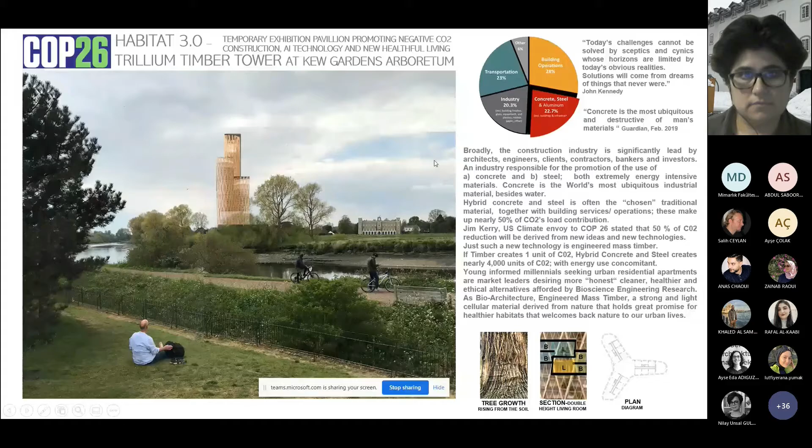The bigger issue was to see whether new ideas could be brought forward, because construction, particularly steel and concrete, make up about 23% of the materials used, and whether there's an alternative that might be suitable. About 40 to 50% of all CO2 actually has a lot to do with the use of materials and also the life cycle use of energy.

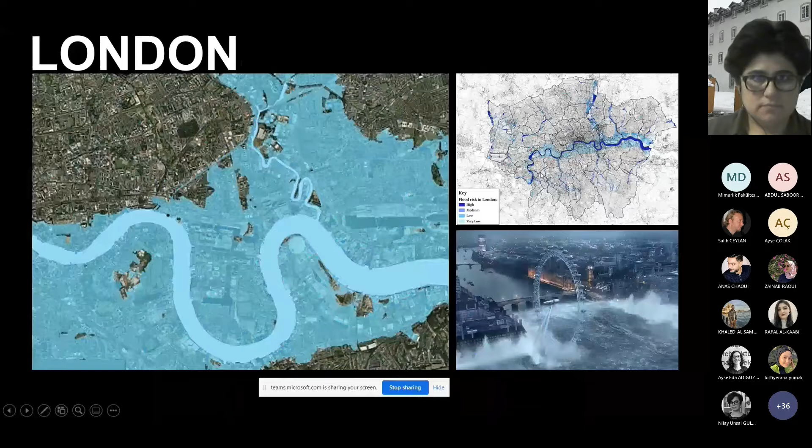What would be the effect if global climate change continued and the planet heats? One effect is that the ice caps in the north and in the poles will melt, and that would inevitably cause flooding of major cities of the world. London is one of the great cities that will be most impacted. New York is another city as well, should the ice caps melt, and basically about 50% of it disappears.

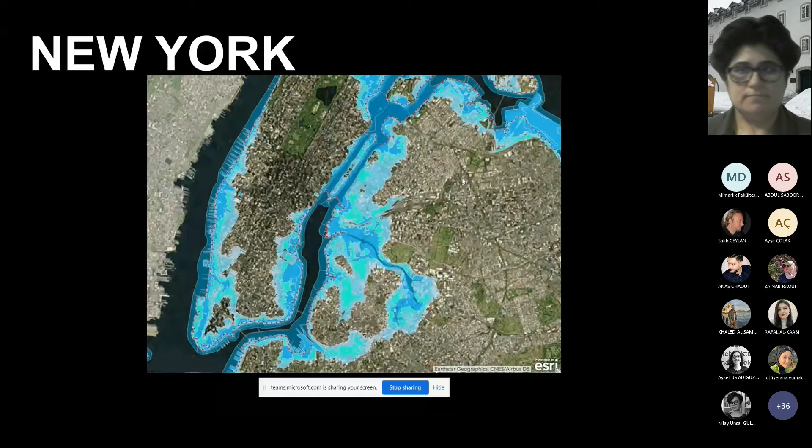St. Petersburg is another city highly at risk. In fact, it's common to have flooding there, and they've built a dam, but like any great engineering feat that tries to control natural water rises that are going to be so extensive, it may not be the final solution. At the same time, Istanbul also has concerns in terms of flood risk presently.

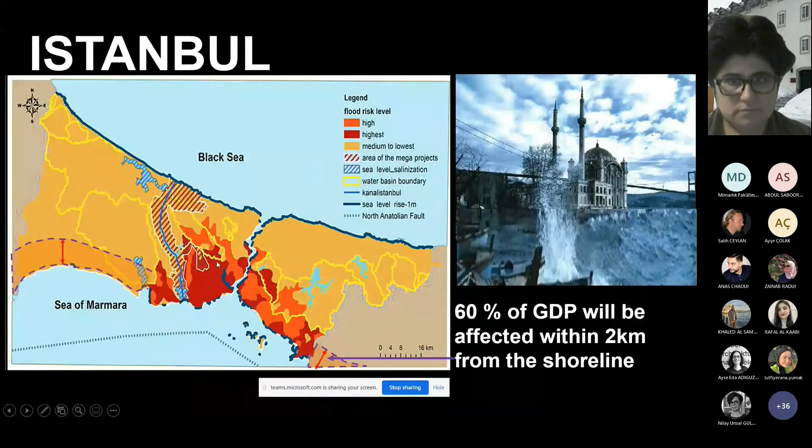The other thing is that within 2 km from the coast, those areas of land represent about 60% of the country's GDP. So flooding is going to have an impact.

One of the things that's interesting is that there are reasons we haven't moved forward very quickly, having to do with the way people think and handle new information and new challenges. Very often people believe they know more than they actually do, and it's a problem if people don't believe in the science, in facts. There's even a term for it, the Dunning-Kruger effect, where people tend to believe what they shouldn't really believe because it makes them feel comfortable.

The second problem is our love for present technology, which is very often 19th century technology. This is a compressive force of a piston running on gas. Gas is one problem, but the piston itself draws in air with a certain particle size, and the pistons pulverize that dust, creating even finer dust. That very fine dust is causing a problem for the Himalayas particularly.

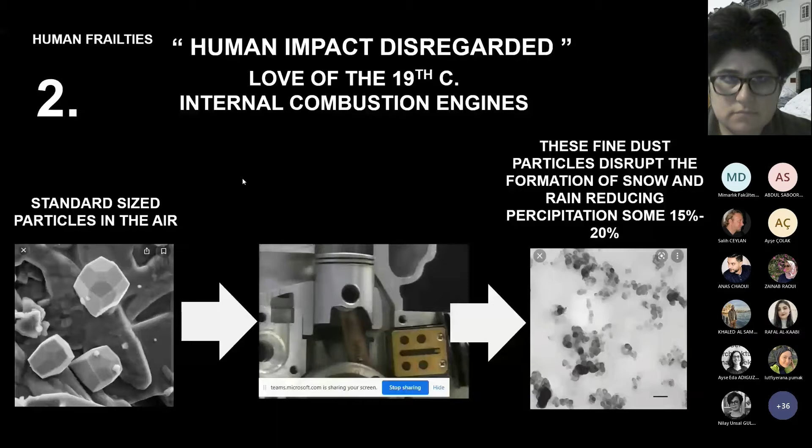There have been lots of studies done, and this very fine dust disrupts the formation of water and snow crystals. Though there's been a lot of discussion of glaciers melting because of heat, and as it melts the darker particles rise due to air pollution, there's another issue: the glaciers are not being fed with more ice, because the production and creation of ice crystals that would build up the glaciers again isn't occurring as it normally would, due to the fine dust.

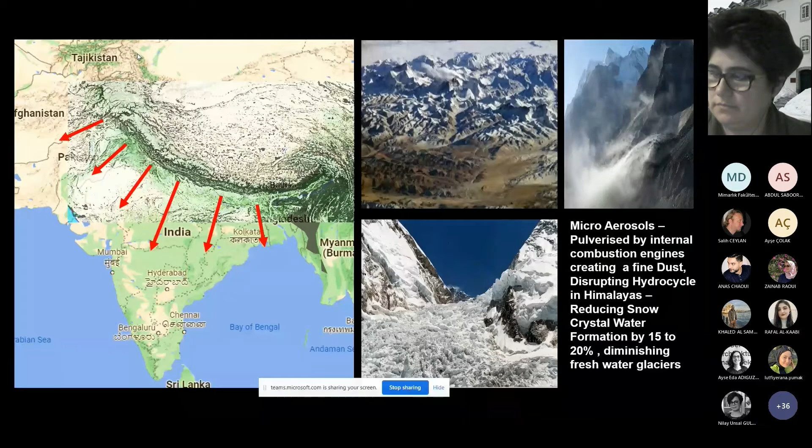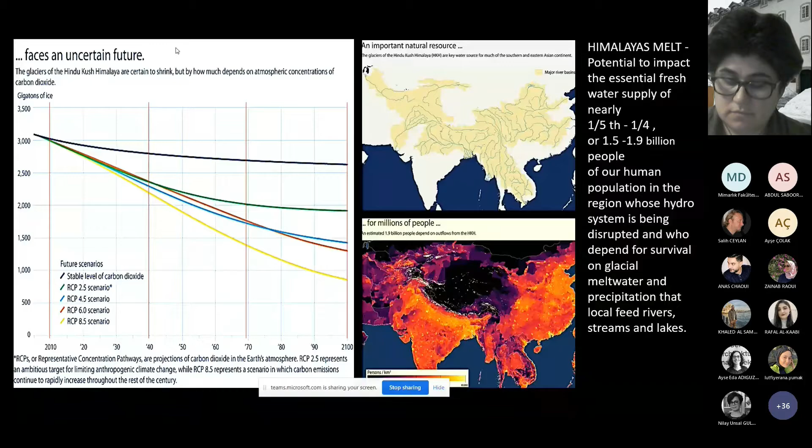That's a problem, because about 1/5 to 1/4 of the world's population depends on the Himalayas for fresh water. Presently, directly, about 250 million people require that water for bathing and drinking. But once it's disrupted, it doesn't come back, and the aquifers will be depleted at the same time. That's a serious concern. It has to do with global warming, but also with the technology we're using presently.

The other funny thing is that people don't respond to things that happen very slowly on a lifetime basis. Using a very crude example, we've had increases in CO2 and the effects of global warming since the 1980s, when Margaret Thatcher made quite a long speech at the UN. A very good speech—she was a chemist, so she understood some of the particulars and the challenges.

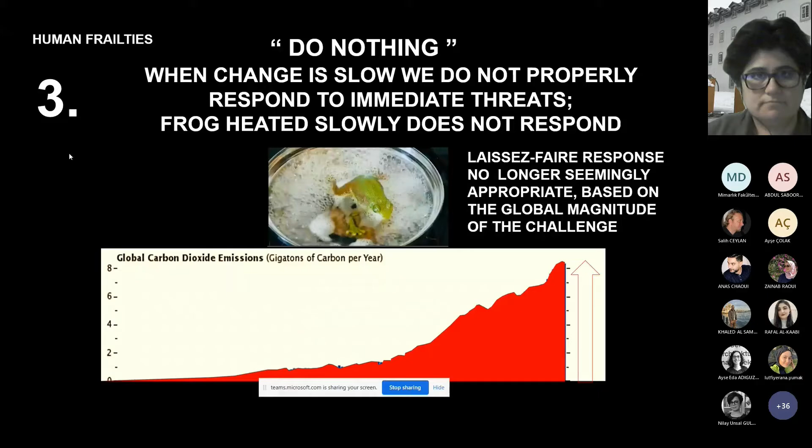But since the 1980s, things have not really moved so terribly fast forward. Part of it has to do with the public's belief that things are not changing when they are, and it has a lot to do with how slow people are to recognize something if it happens throughout their lifetime. The other thing is that the oil industries, particularly because they're under investigation, have intentionally created disinformation. So anything that happens that would cause people to think maybe this would be a good time to make changes, there's always a counter argument that says things are okay, that what you believe is not true, and the public debate becomes very muddied. You can see this in some of the very odd beliefs Americans hold even to this day.

There's an article on how do you create a collective sense of urgency? How do you bring people together? This article made the case that science seems to say that if you can make people understand they're living in a single world together, and also that they begin to have an emotional investment in that world, that helps. They went on to describe this sense of awe that people need, in order to move things forward properly together. We need to see the challenges, but also the benefits that nature and the world around us provides. That will develop a certain intellectual empathy and emotional engagement, and from there people collectively can move forward.

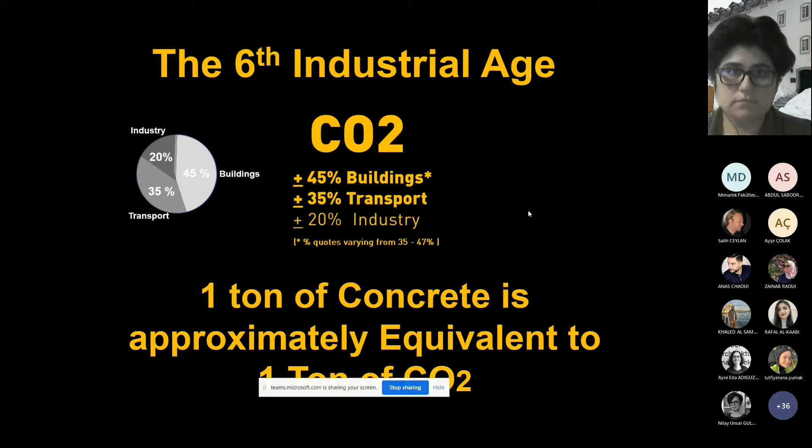Their great success, and also the use of certain building materials, has had a huge positive impact. But because they've become so ubiquitous and have created a very homogenized method by which we transport and by which we build, their great success also means that the materials have deficits. And it's those deficits that begin to add up to create more problems.

So if you had a ton of concrete, basically you have a ton of CO2. But by contrast, if you have a ton of engineered mass timber, it basically saves and sequesters about half a ton of CO2 broadly. So you can see that if you use a different material, it might be better because it can sequester CO2. That's what timber does.

I'll go through these really quickly because you can look at them later. But it's interesting. So we did studies with Cambridge University with all this in mind, that we needed to create new cities, and this should work.

By 2050, the world's population is expected to soar to almost 10 billion people, and two-thirds of us will live in cities. Space will be at a premium. High-rise offers a solution, but concrete and steel, the materials we currently use to build high, have a large carbon footprint.

An answer might lie in a natural material we've used for millennia. I think it's very realistic to think that someone will build a wooden skyscraper in the coming years. There's a lot of potential that's unrealized for using timber at a very large scale.

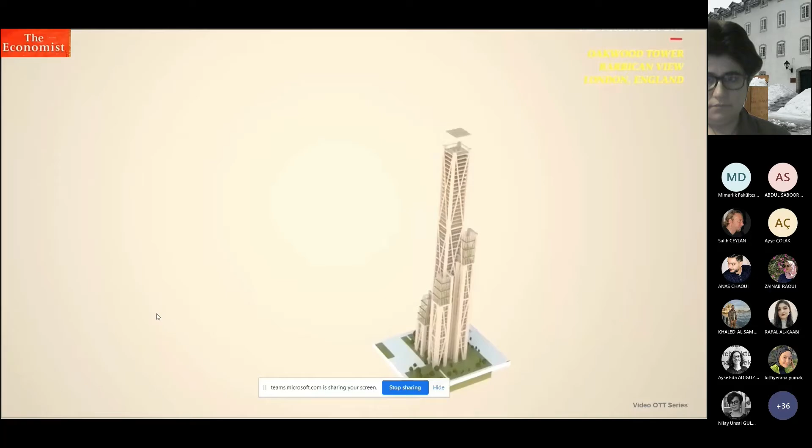Throughout history, buildings have been made of wood. So why, after more than a century of concrete and steel, are some architects proposing a return to wood?

Concrete and steel are costly to produce and heavy to transport. Wood, however, can be grown sustainably, and it's lighter than concrete. And crucially, as trees grow, they absorb carbon dioxide from the air, locking it into the timber. One study showed that using wood to construct a 125-meter skyscraper could reduce the building's carbon footprint by up to 75%.

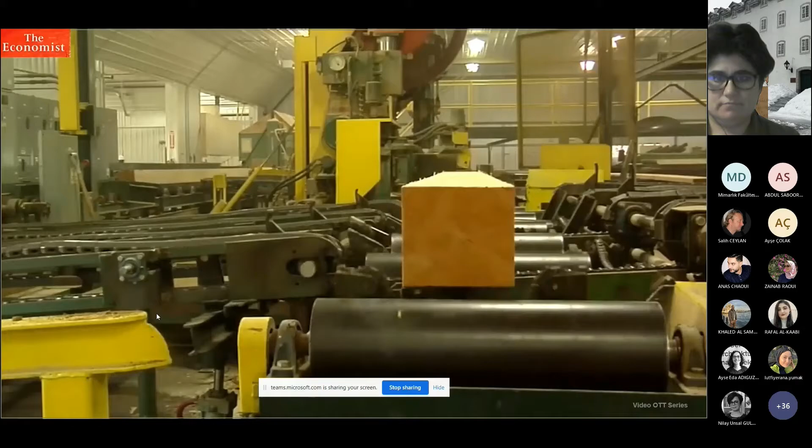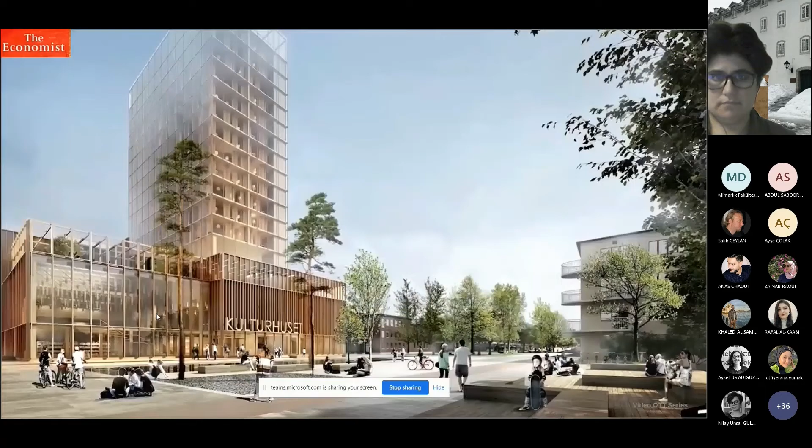Regular timber isn't malleable like steel or concrete, and it isn't strong enough to build high. But engineers have come up with a solution. It's called cross-laminated timber, and this London practice is not alone in advocating the use of CLT. Ambitious wooden high-rise buildings are also being constructed in Scandinavia, Central Europe, and North America.

As yet, nobody has used CLT to build beyond 55 meters. But Michael Ramage's research centre in Cambridge, working with another London practice, has proposed a concept design of a 300-meter tower to be built on top of one of London's most iconic concrete structures, the Barbican.

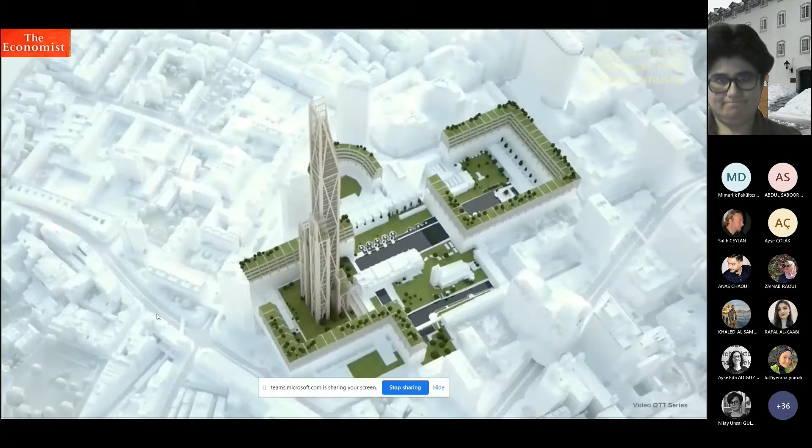The way we've engineered the Oakwood Tower is to look at the global structure and ask: is it stable, and would it stand up? And we believe the answer is yes.

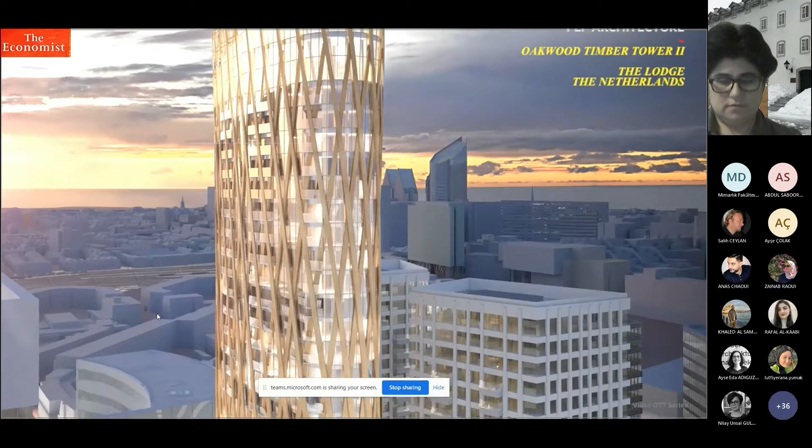I think we'll probably see incremental increases from the current height of about 50 meters, and at some point someone will make a step change, probably to about 100 meters. Making that jump in height will be a difficult sell. The cost of building wooden skyscrapers is largely unknown, but those costs could be reduced by prefabricating large sections of buildings in factories. And city dwellers will need to be persuaded that CLT does not burn like ordinary wood.

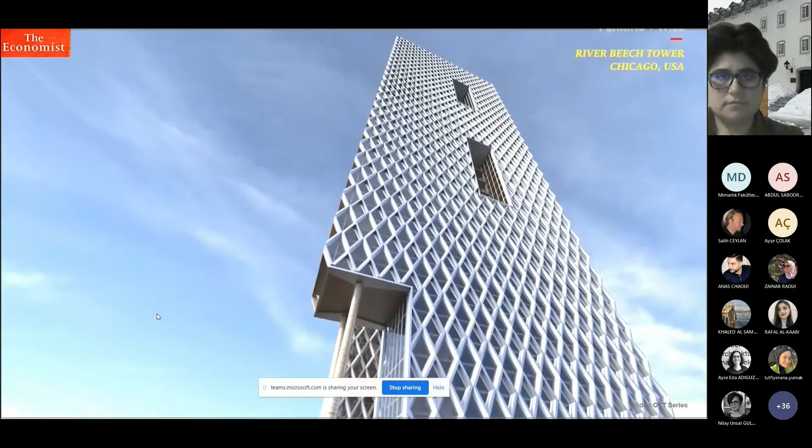As an attractive natural material, wood is already popular for use in low buildings. If planners approve, it could rise to new heights.

So let's make the cities more comfortable, pleasurable. And since COVID, we understand why that's important, because we were all in lockdown. We all needed to go see green spaces, as we did. So how do we create these healthier cities?

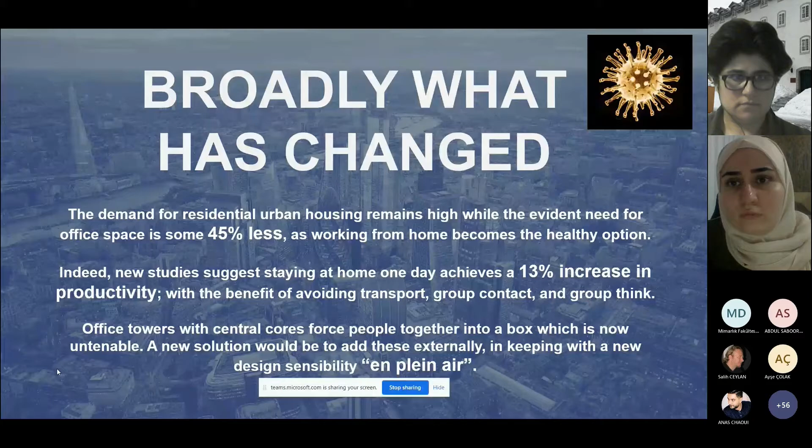One of the interesting points they found is that if you could stay one day at home a week, your efficiency and productivity increased 13%. And for me, that kind of tells you there's something wrong with modern office buildings—the concept of them, the hierarchies that exist within them, within companies, that they're not allowing people to work to their optimal. And therefore, people tend to be unhappy to some extent working in these buildings. So it's almost a prison that we've created of our own devices.

So now is a good time, while COVID is still disrupting the world, to just look at these things in a different way and see whether we can make things better.

So 57% appear to love to live and work at home presently, but actually two-thirds of the people within office buildings typically are millennials or will be, and they, by a vast majority, want to work from home, whether it's every day or not, but certainly not as we did before. Work habits will need to change to accommodate new preferences.

So that's interesting to look at buildings. Well, what's really wrong with them? Well, there are a number of social problems with them. The internal core is one of them. And of course, for COVID reasons, the present building designs don't allow for anything near the 2 meters or even 1 meter that's required. So the capacity of the lifts can't manage the populations any longer and won't be able to within a safe condition.

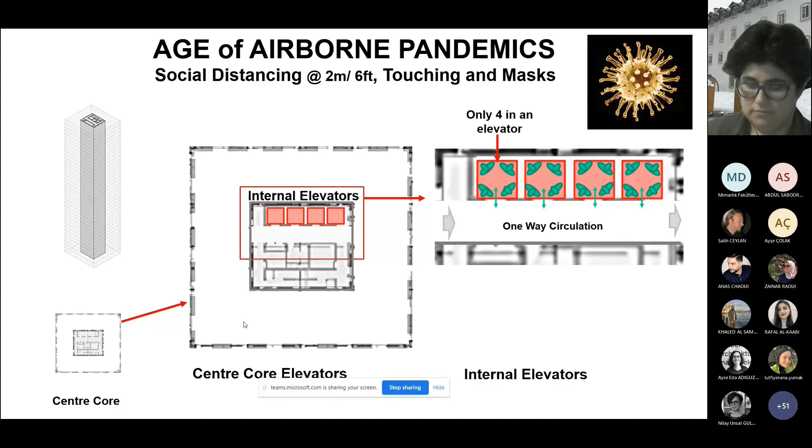Now, we all might say, oh well, COVID's going to go away, we don't have to worry about this, but that really doesn't seem to be what will happen. I think we've opened up a new world of challenges, and maybe the designs of buildings need to accommodate those new challenges so that people feel safer.

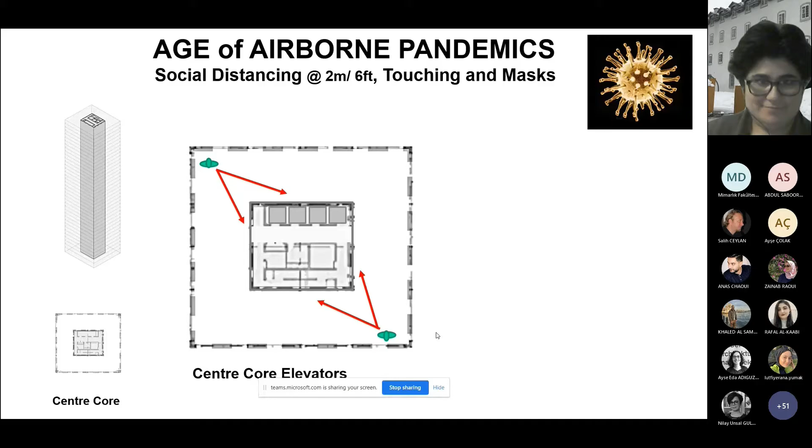The other problem with building plans with the center core is that - and this happened to me - I knew there was somebody working in the company on the same floor as I was, but for a year I never saw them because they were at opposite ends of the building, and the core itself meant I never had any direct view to be able to see whether the person was actually there. So it's a better idea in a lot of ways to try to distribute the core through the floor so that these social engagements happen more easily within the building floor plate.

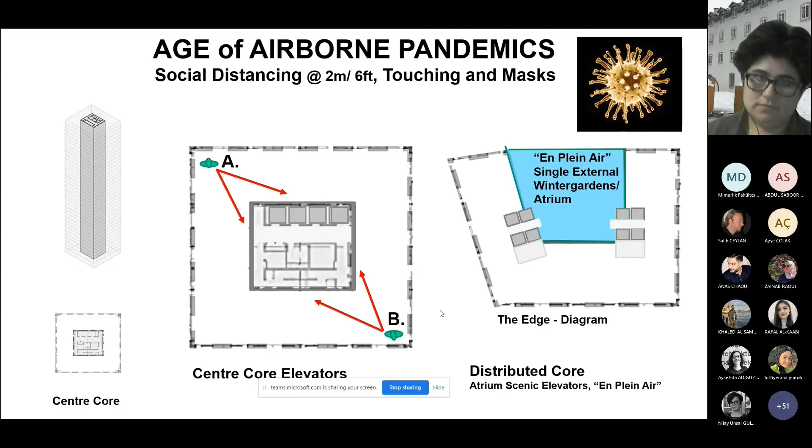And that is somewhat what happened with the project called the Edge. This is just a diagram, and that's the Edge there. It was the world's most sustainable building, and thought quite cool. It's one of the best examples of Internet of Things. This is just showing the wood that was used, which people enjoyed.

There was 2.5 times more sort of 'sticky' applicants who wanted to stay and work in the building. There were a lot of benefits in terms of wellness. It won lots of awards. But one of the things was that the open space, the atrium, was quite open to views to the outside, to nature at large, and there were changes during the day.

There's one thing about buildings - we have so many mechanical systems that monitor a constant state of temperature and light that people actually get bored working in them. In other words, they've been perfected to such an extent that they don't cater for people's desire for change, for views of green, or changing situations within the floor plate. So that's why, in a sense, the atrium of the Edge was working so well.

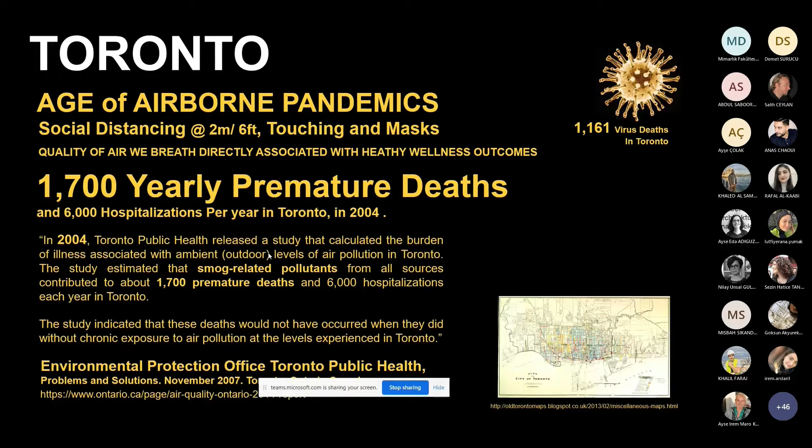The other thing that should be understood too is that the demolition of buildings in cities that are very vibrant in building and rebuilding - every time a building is demolished to build anew, the silicates from its concrete and other fine particles are also distributed into the air, and the silicates have been found to be cancer causing. So again, a problem with air quality in cities has a lot to do with the materials that are being used.

And there was a study recently about premature deaths in Europe. About 250,000 people die in Europe due to the fine dust.

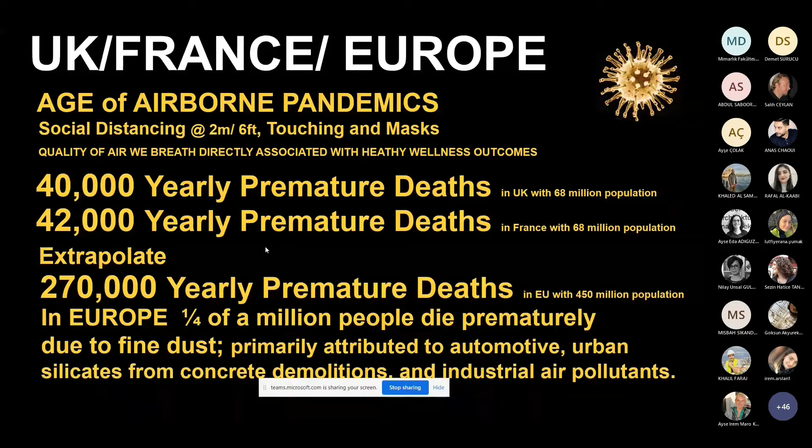Many cities track air quality on a yearly basis, in France and the UK from what I could find. Perhaps what we could do is look at electric cars, without internal combustion engines, and also create green spaces within these cities that will act as lungs to purify the air, as they did in 19th century London with plane trees whose bark would fall off to allow the tree to breathe properly.

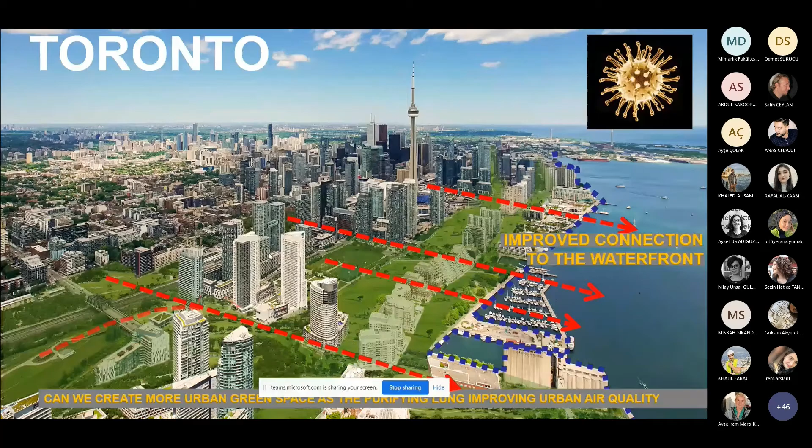That's a great idea for autonomous cars too. We could think of cars in a different way, and cities in a different way. How do we green them, particularly along the coastline where people like to walk, because there's a changing light and a character of openness and distance and broad skies, which you don't find in dense urban conurbations. Going to the waterfront is always a lovely experience for most city dwellers.

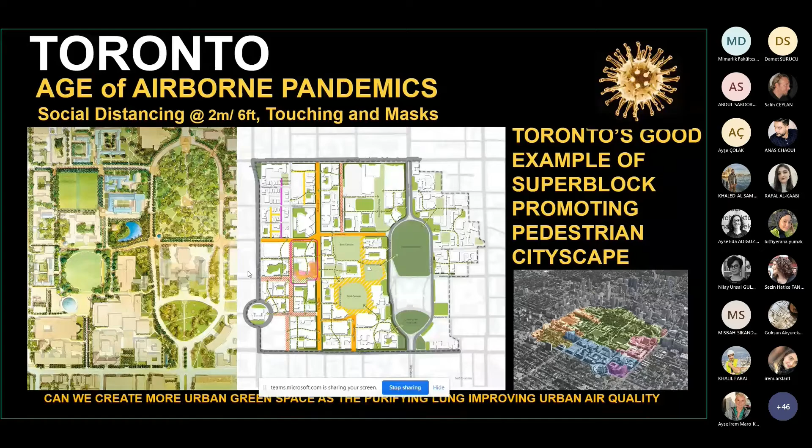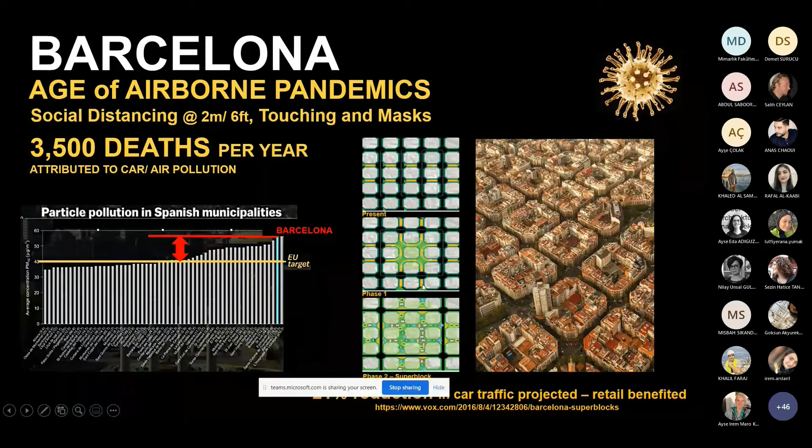The other thing Toronto is doing is trying to create pedestrian linkages within city blocks. Barcelona is one of the cities that really looked at air quality as a big problem, because it is a problem for them. They started studies on how to create superblocks where pedestrian movement is given preference over cars, and that is ongoing.

I just read a study this past year. But the bigger thing is that our minds have changed. When we look at things we thought were very advanced in the 20th century, they now look not so advanced, and it has nothing to do with their being preferred in the 20th century. It's simply that we didn't have quite as many of them.

The industrial economy has really now become a global fixture, and their pollution has also become a fixture. So problems that we may have had that were small and easily handled, because of their success, have created bigger problems that sometimes are unmanageable for us, like the pollution of streams and those sorts of things.

So in the 21st century, certainly for my children and for millennials proper, they see, well, why can't we use natural products more than industrial products? This leads to marketing of apartments for millennials, where they can have a balcony and private space and can see wood and timber and natural material that's pleasant to the eye, with some benefits too in terms of air quality within the building.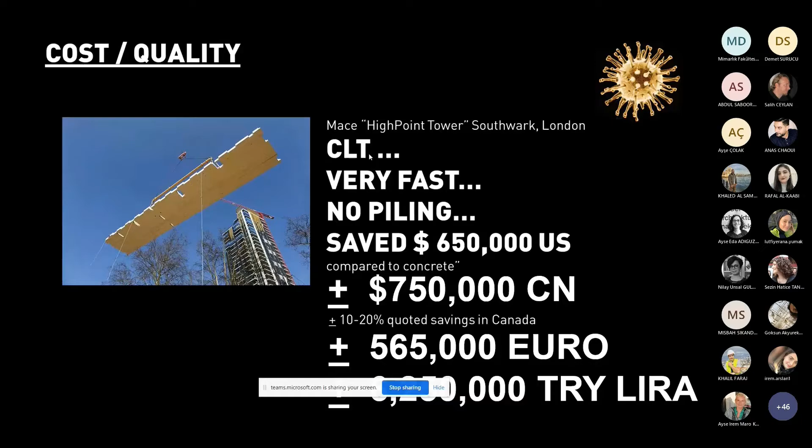These ideas build further on an architect in Canada, where timber is pretty ubiquitous. They've also found that using this material, because it's so light, reduces the need for piling and foundations in city centers, which typically take several months to complete. And if you have existing tunneling, you need to engineer your work to avoid those tunnels at great extra expense, so there's time and extra expense involved. If you use a material that's strong and light, you could save some money.

This is a wonderful early project which we used as a template. What was interesting about this 50-meter building was that it was based on a bridge that had been set vertically on its side. There was also further discussion that they were studying, in a similar way, a 100-meter tower. This is my mock-up of that idea, just for illustration.

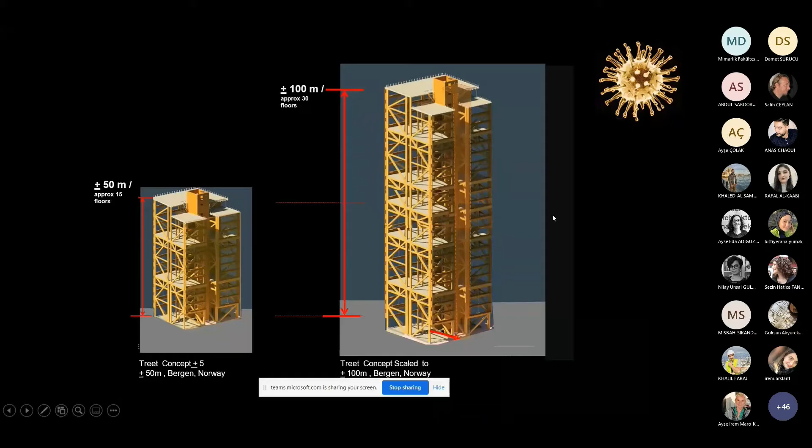But in the industry itself, what's happening is that they've taken this notion of timber buildings and simply redressed concrete cores, structures, and floor structures with some timber. You can see here the image in the middle is basically the structure, the fundamental stability system, which is actually all concrete. In the plan you can see that too - it's concrete, concrete, concrete. The columns adjacent, and even the floors were poured or planned to be poured in concrete as a topping to the wood planking of the floors.

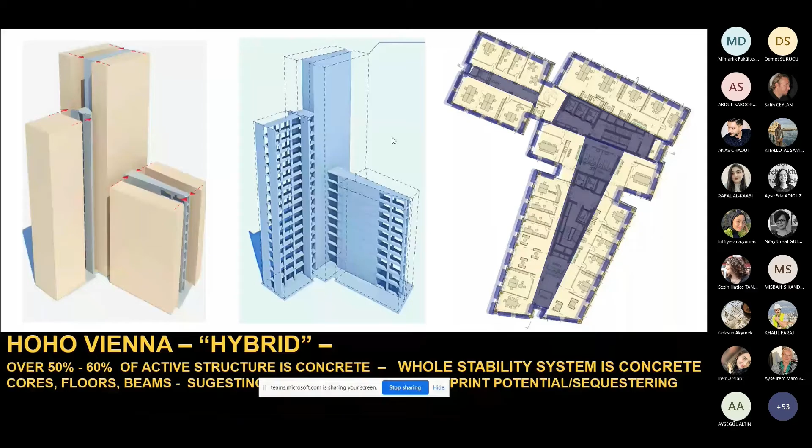So it's not going to really benefit the CO2 discussion so terribly much. It'll benefit to some extent, but it would be better if we could manage to build very quickly, as this illustrates, but without that concrete core.

So the general idea is that hybrids are good, but they're not really helping as greatly as they could be compared to using a single material throughout. Both structurally there's a benefit, and also in terms of time and potentially cost, depending on cost regimes and the expertise of people using timber versus concrete. You can see there's planking, but typically there's some overtopping of concrete onto the wood planking as it comes in.

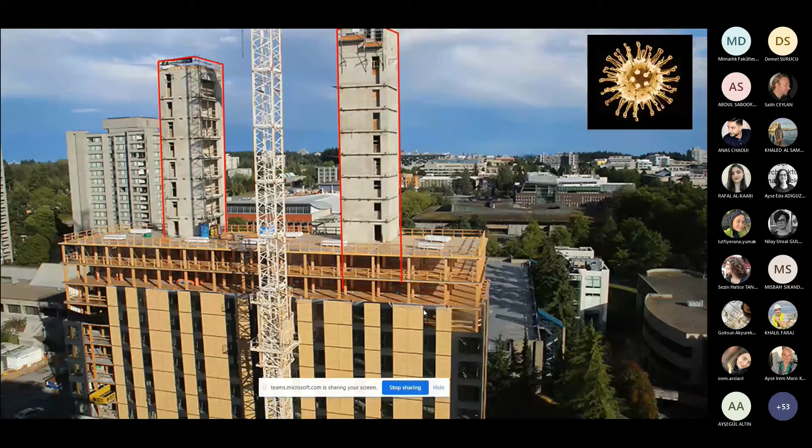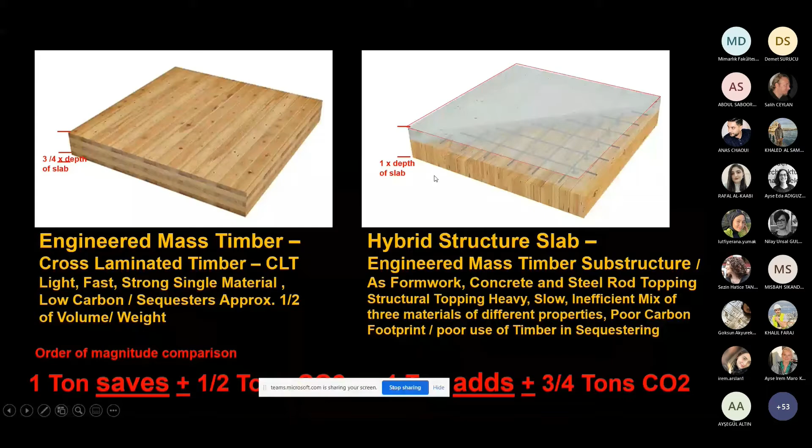So hybrid slabs are coming to the fore in Germany particularly, but they're not going to save as much as we had hoped. When using timber, a weaker material, for high rises, you need to think of the core position. As we earlier described, the core position in the center is not so good socially in terms of building use, and it's not really catering for human use or human interaction.

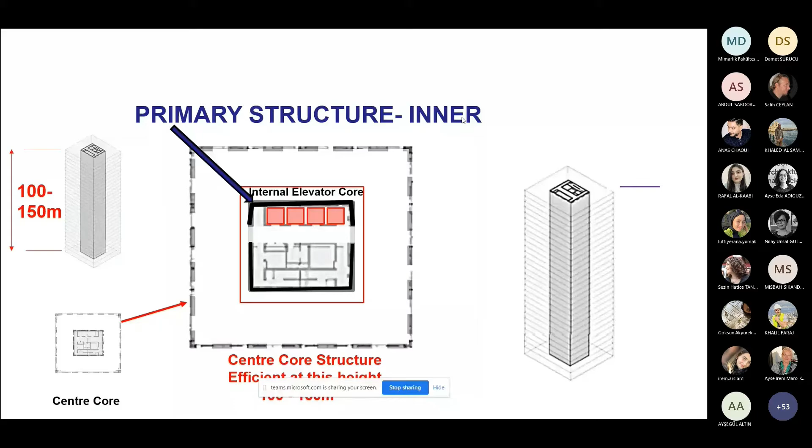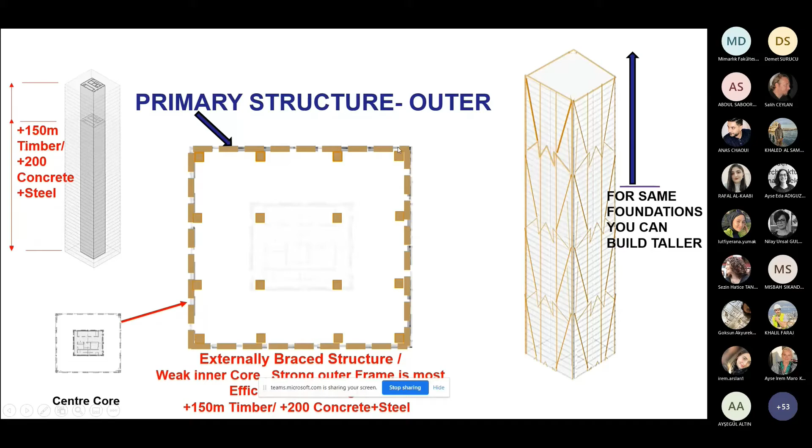That's a great disbenefit when the cost of your company actually is in its people. So moving the core away and making it weak, in a sense, is a strategy where you put the stability system that would have been required for the central core out to the outside instead. This is what trees do as well. In nature you'll see it's the distance between the two major supports that provides the stability and bracing.

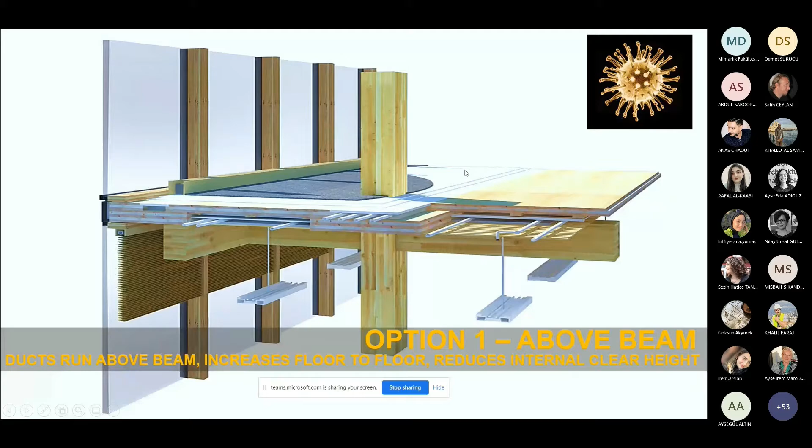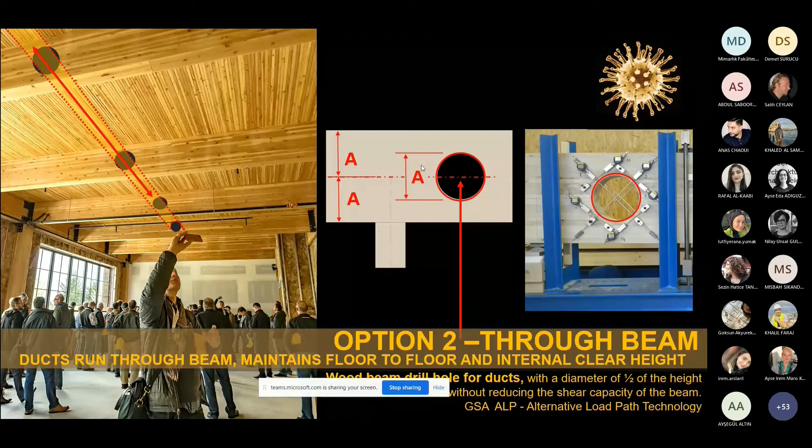These slides show how air can be moved through, because air is a significant factor in COVID and really needs to be solved in order to allow people to feel safe going back to work. There are new systems, particularly for timber, that will allow this to be done happily and easily enough.

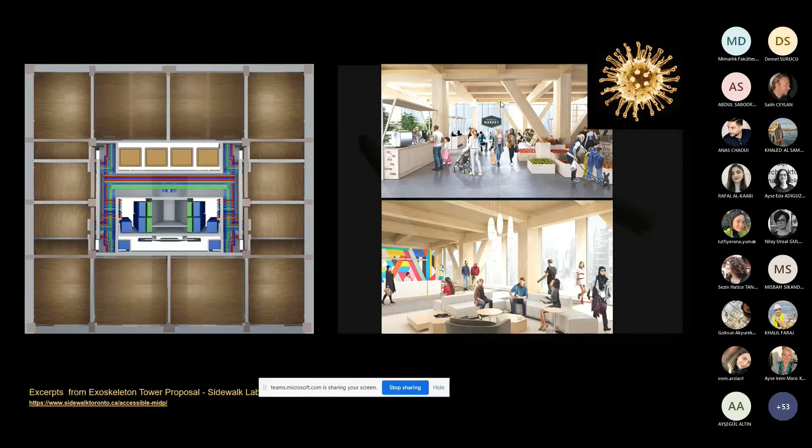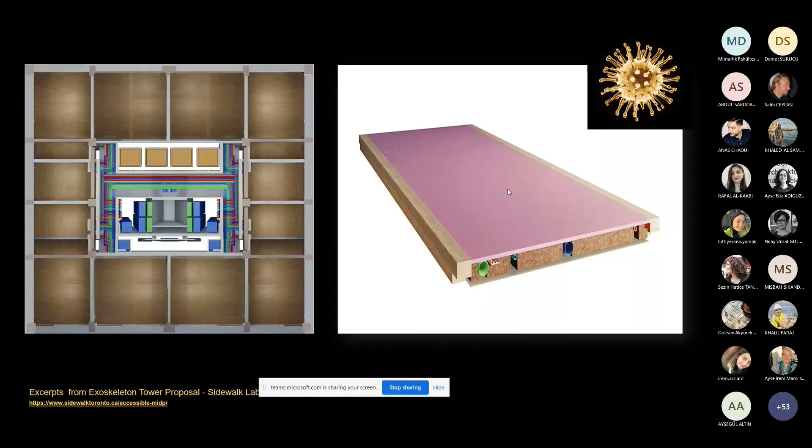Some further slides: this is a proposal for a building in Toronto. I think this slide shows what they're planning to do. I'll leave the PowerPoint up so you get a sense of it—a series of timbered layers.

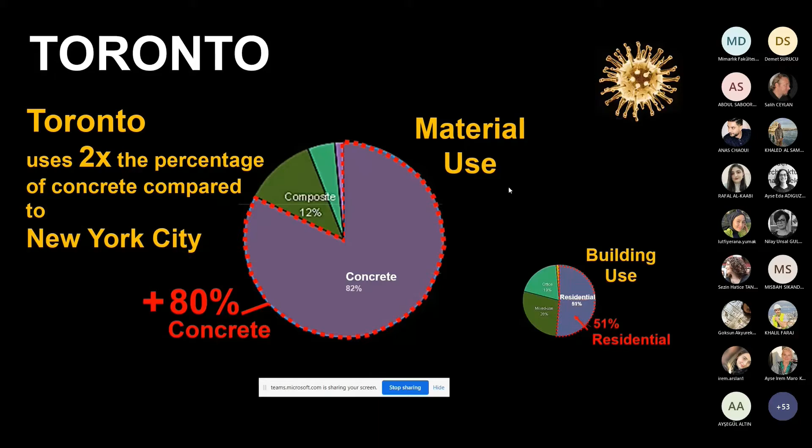These are also mentioned in Toronto, that it's sort of unusual because of the amount of concrete used, and of course more than 50% is being built for residential. So it's an anomaly in a way, and it's easy to understand why that industry is so favorable there.

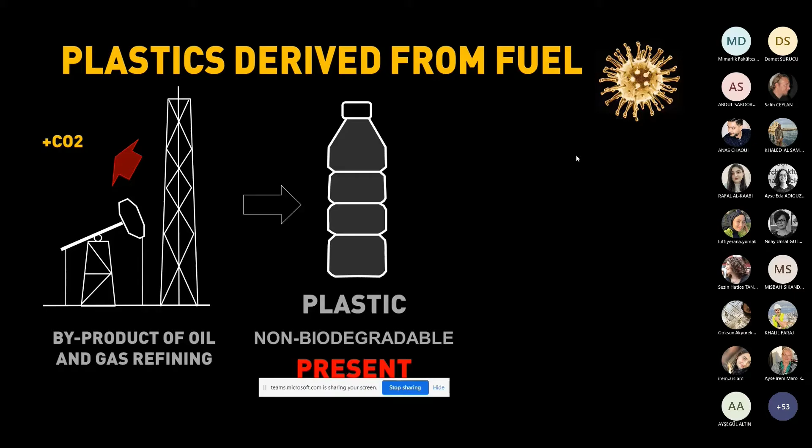The use of timber also has processing byproducts like lignin and other elements that can be used for bottles rather than those presently used in the refining of oil and gas. They tend to be biodegradable, unlike those used in oil and gas manufacturing and refining.

So that's a benefit, and certainly understanding now that we are ingesting bottles and polymers, and it's having an effect on our health, is probably a good thing to think about as well at the same time.

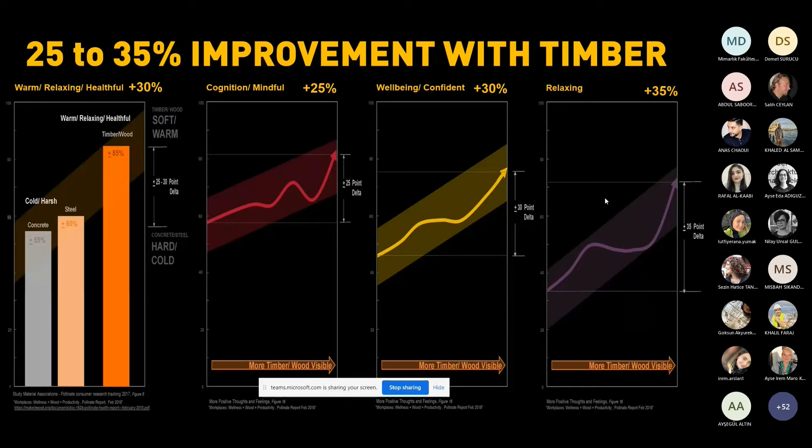So bringing these features together suggests that if we can bring this timber material to buildings internally, and even if we express them externally, we're going to have a profound change to the psychology of people within cities. This is really interesting because it's a material that not only sequesters CO2, but actually changes our minds, changes how we view ourselves, and improves our sense of well-being and our health. Our blood pressure reduces, and we are much more cooperative, all these wonderful things.

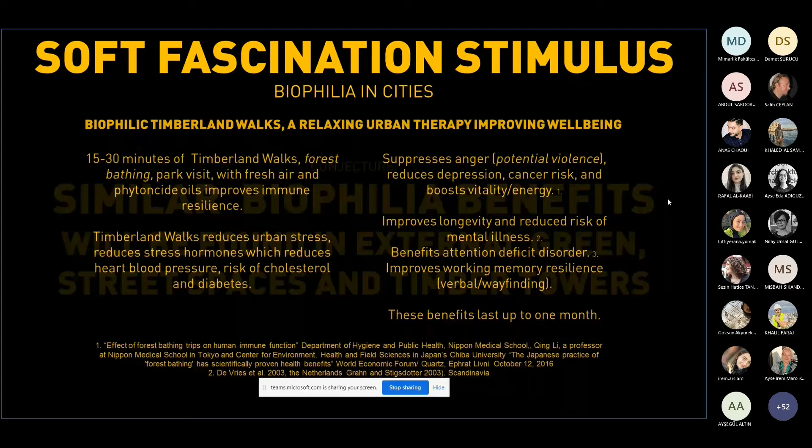It's really interesting, I'm going to leave this for you, but there was also this idea of impulse control, that people who have a hard time in cities - and you know them because it's typically people who have road rage - if they come from an area or live in an area where they have the ability to see green spaces or parks, their involuntary reactions are improved.

One of the reasons people say, well why is it that we like trees? I don't know. But there is a reason, because we actually have two brains: the involuntary brain, which is basically our spine, and our higher cognition function, which we call our brain. But it's that brain stem going through the spine that needs, apparently, to see green practically every day, not for too long. Without seeing it, there's a negative effect.

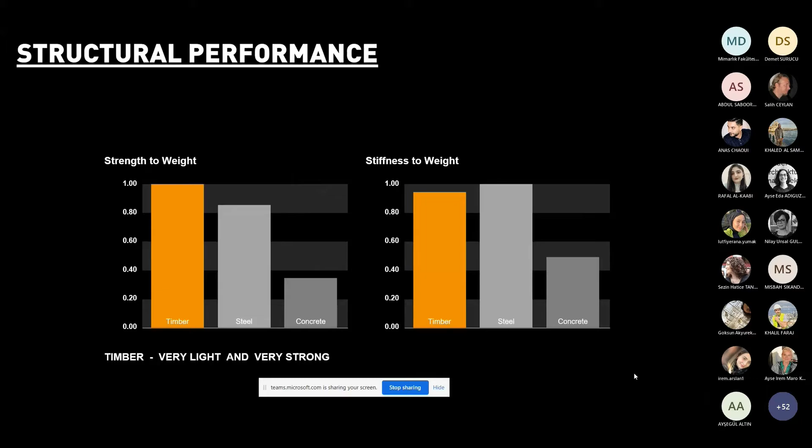So that's interesting - green cities, there are some benefits when you use the material internally, which I'll leave you slides of. And then these are the slides for the timber tower, which you can go through at your leisure. There are animations tied to it as well.

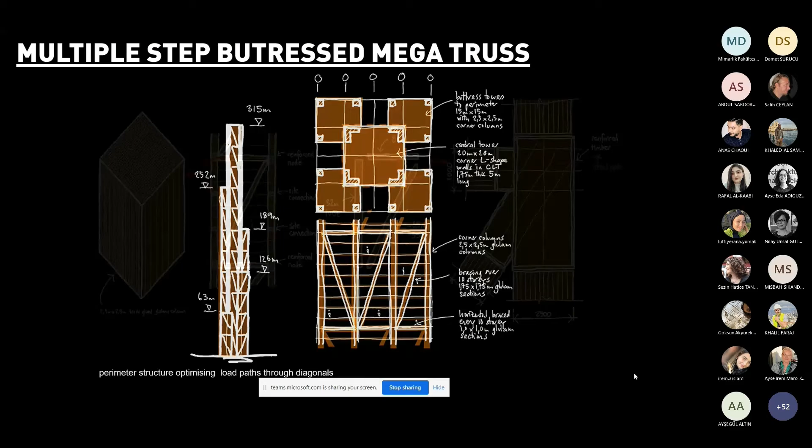It's really saying that we can grow these buildings within a very short period of time with the stock of available material in Europe, about 2 hours roughly. The engineering's possible, still needs some investigation of course, but the use of robotics and jump factory staging, which was a proposal by Bouygues in France when we had some meetings with them, would really allow us to build these very inexpensively and fast.

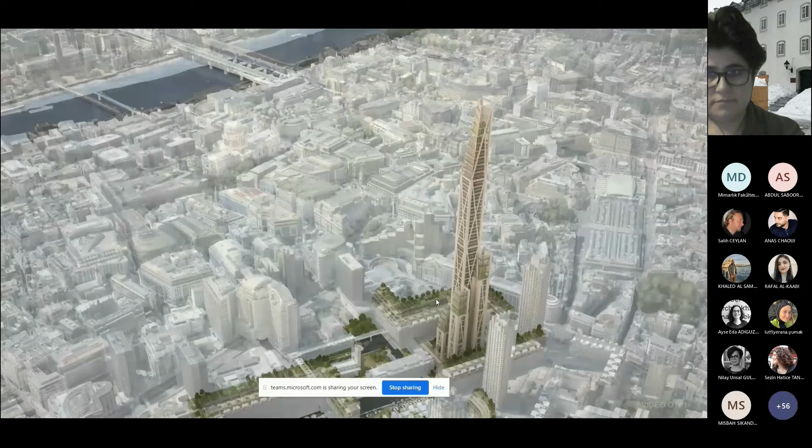Okay, so this will take another few minutes.

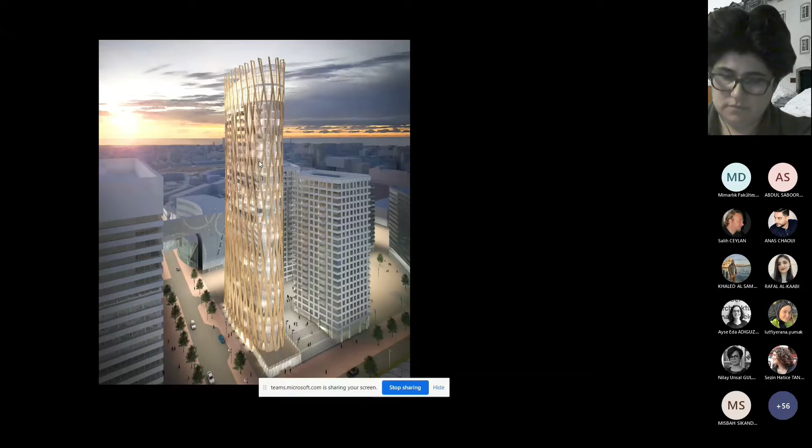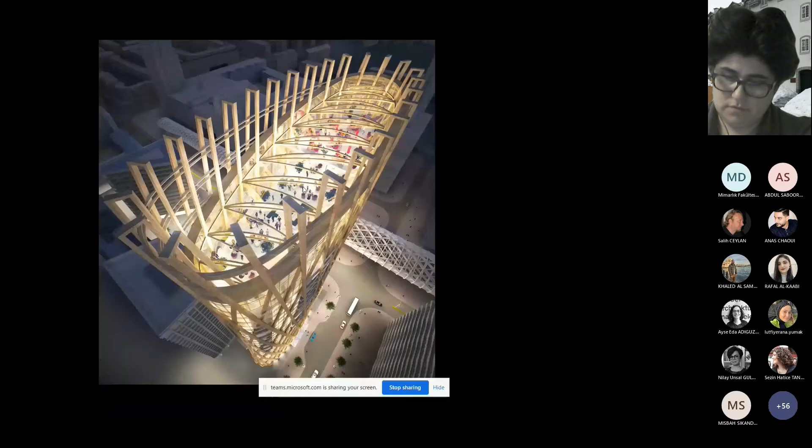So there you go. The external bracing actually shades the internal. There are the decks and balconies, the upper lounge area, bars, and I'll just go through this really quickly. And this was in the press as well, as it was said it would save about 75% on the typical footprint.

So one of the things I'm really saying is that the material could allow us to go negative in a sense, because we have to reach zero and our population is rising. Without sequestering and some of these very dramatic methods of capturing CO2, we're not going to meet any of the goals, because it's a mathematical difficulty when your population's rising. At the same time, you have what are third world countries now becoming second and first world countries. And of course, if you can save a huge amount of tonnage of CO2, it also represents many lifetimes, human lifetimes.

So I quickly calculated that if we could build many of these buildings, it wouldn't be too difficult to sequester half Europe's population in terms of lifetime CO2. And that's what these other slides are trying to illustrate as a notion. We did some other studies to go really through quickly with these, and that's it. Ta-da! Okay, so I'm done.